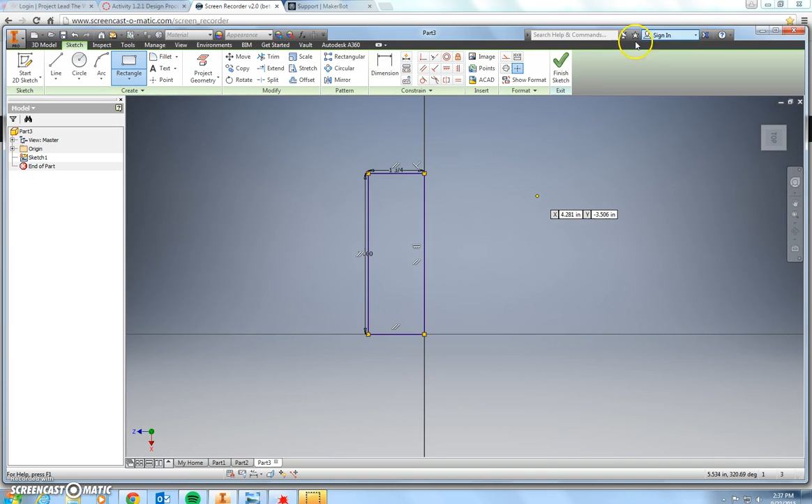I can see that this object is 5 by 1 3/4. You're going to type in 1 space 3/4 for fractions. Type it in just the way it looks. Don't worry about decimal equivalent. The computer will take care of that for you.

Okay, we're going to finish this sketch, and let's make it the entire height it should be, which in this case is 2 3/4. So I say 2 space and then 3/4. Use the keypad on your keyboard to make that.

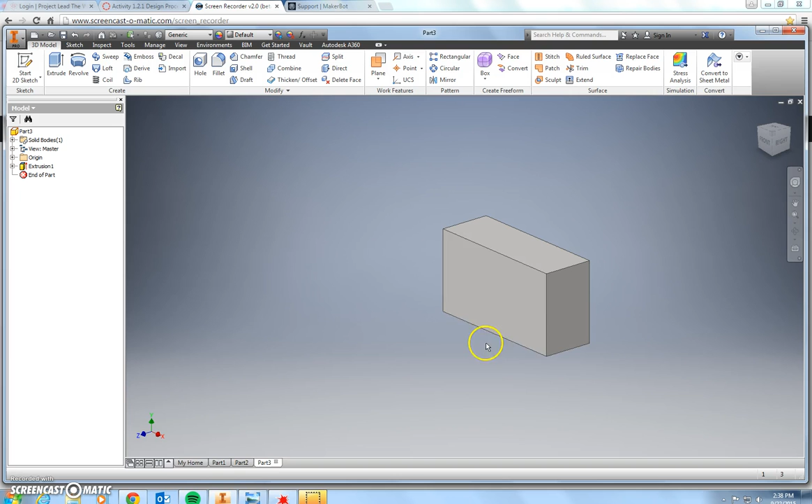Great. Now what I'm going to do is I'm going to draw a shape to cut out, the two shapes. I'm going to draw on the face, and I always like to work from my home view. I'm going to show you a little trick here. I'm going to make a rectangle, and I'm going to just draw it on the line. Now this rectangle is not going to be in the right spot. It will be the right size, and I will move it later.

The size it should be is the dimension in blue should be 1 1/4 by, and this is a hard measurement to read, 9/16. And you can barely see it there. It's hard to read on your drawing.

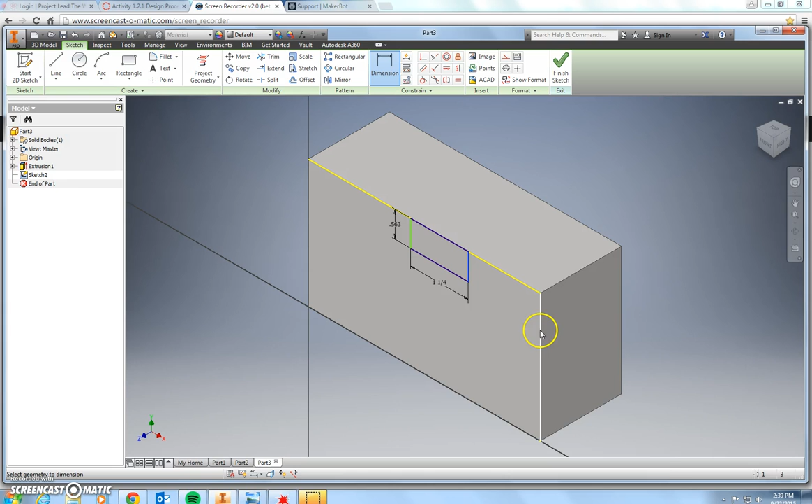Once I have that, I need to move the entire shape from this line to here to push it over to the right location. So I'm going to choose this line and this line after grabbing my dimension tool, and I can move that to its proper location, which is 1 7/8, so 1 space 7/8, and you can see it just moved it on down for me.

Next, I need to draw the shape underneath, which is essentially a square shape with the corners cut off. But I'm going to draw that using my point tool to lay out some dots and then connect the dots. I like that the best. So first let's take a point and drop it on the line. Make sure the line turns black.

I then am going to move that point from here to the edge. We're going to make that 1 1/4. If you look at your drawing, you'll see that that corner is 1 1/4. 1 space 1/4.

Alright. Now what I'm going to do is I'm going to drop another point straight above it. I'm going to highlight that one, come straight above it with my line tool, and make sure I have my dotted line, and just click. It's straight above, but it needs to be a distance above, which is a 1/2 inch. So I'm going to dimension this here to here, and a 1/2 inch is also 0.5. It's an easy one to do. It's the only time I really like to use my tool like that.

Now let's put the other point on the other side. If it doesn't give me a measurement from here to here, I should assume it's the same. So I'm going to drop a point, dimension it to be 1 1/4 from the edge, 1 space 1/4.

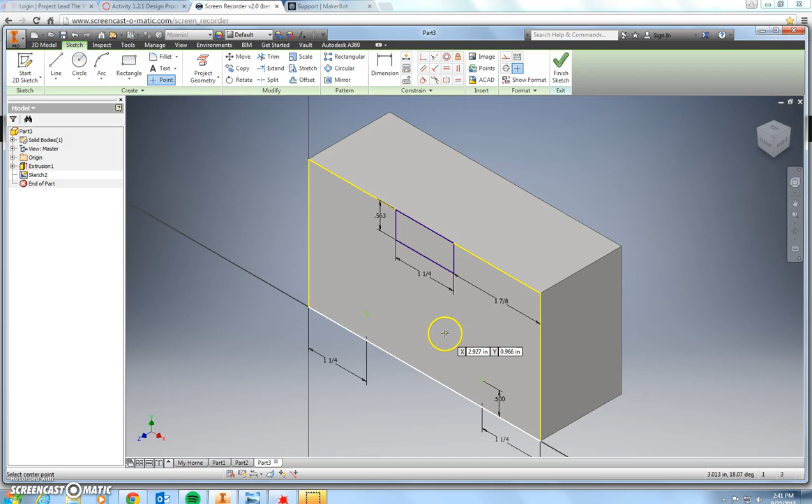Now I want to find 2 more spots to get those in the right area. I want to have a point which is located one about here and one about here. Let's get those laid out. I'll show you how I'm going to do that. First of all, I know that I need to be 1 1/4 inches from the ground up. 1 1/4. That'd be 1 space 1/4.

And let's go ahead and do this one too. 1 space 1/4. Okay, great. The only problem now is they need to be moved around a little bit to get them in the right spot. If I look at my drawing, I can see that this one should live 2 1/2 inches from here to here, okay, which is good.

And this one should be, if you look at this point, it's kind of hard to tell, but it's a 3/4 inch. If I could draw a straight down line, the distance from here to the line going straight is 3/4. So the dimension tool will actually do that for me. Choose dimension, we're going to choose this one and this one. And if you look in between them, you see that 0.75? I actually do want 3/4, and it happens to be that. I just must have got lucky. I'm going to drop that one.

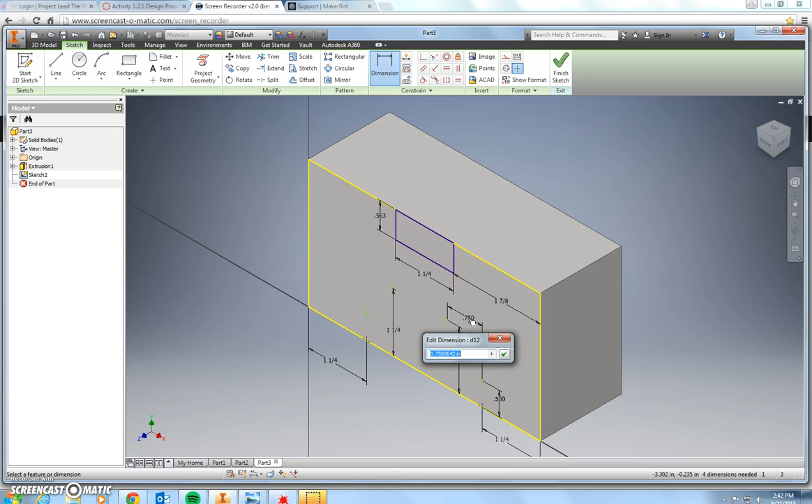Say OK. And we're going to do the same thing for these two. Oh, that didn't quite work the way I wanted. I'm going to back up a step. Do this again. Dimension. Choose this one. Choose that one, and I should get my line. There it is. Sometimes you got to move your mouse around. It's kind of hidden in there. Now that one's not 0.75 yet, so that one does have to be 0.75. It's a 3/4 inch. All right.

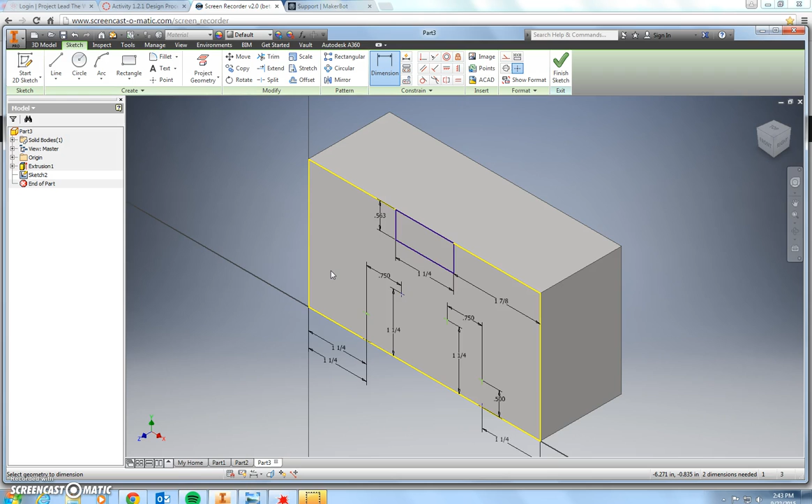Oh, look what happened. It moved this guy over. I didn't want that to move over. Why did it move? It's because I never gave it a dimension. Notice that other ones have dimensions, so this one has to be the same as that one. So let's get that back over there. That should be the same as the number underneath, which is 1 1/4. 1 space 1/4. Now notice it forced it back over. If you don't have a number attached to things, sometimes the whole thing will move because you didn't tell it it couldn't. Numbers will force it to stay put.

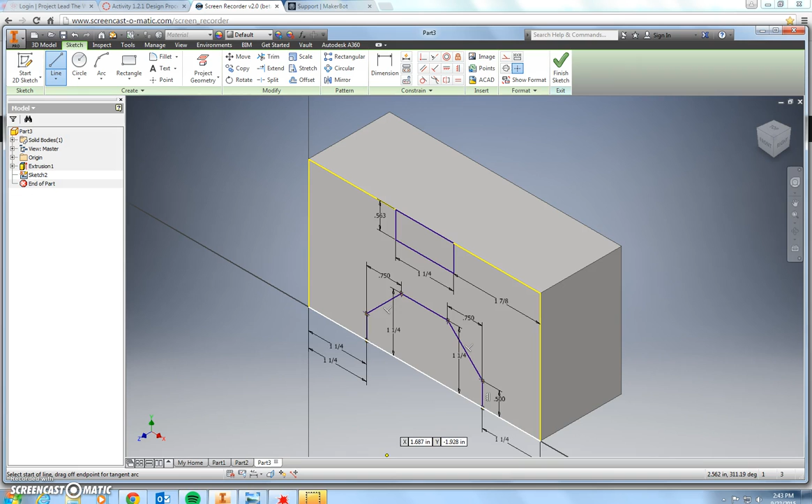Now, after getting all those dots on there, I can just connect the dots. Line tool. Might as well start here. Go to my first one, second one, cross to that one, down, down, and then it's allowing this little bottom line to be part of my shape. Now, I should be able to finish the sketch, and I should be able to push away not this shape or this shape, but the middle.

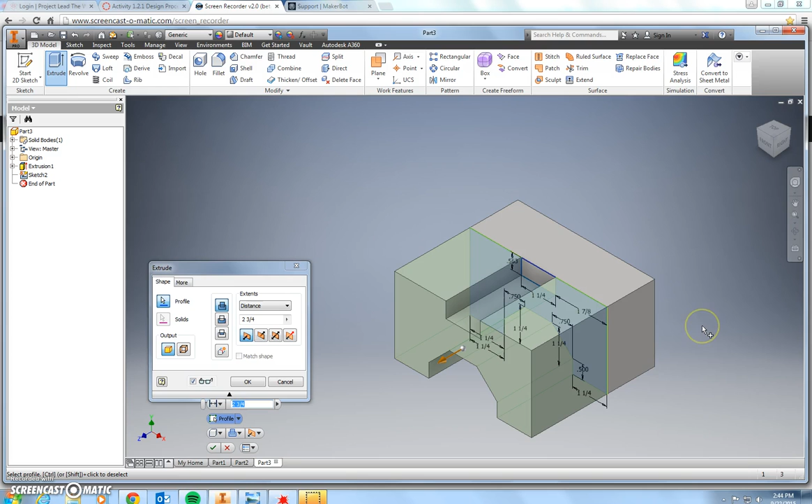Finish sketch, choose extrude. Now, notice that I can either choose this one, or the middle. I want the middle, watch. Click the middle. Now at this point, it's moving it the wrong direction. I want to go in. But I don't want to go all the way. If you look, it's hard to see, but the thickness of the back of the object is a 1/2 inch thick. So under distance, you have the entire distance, which is 2 3/4, which is too much.

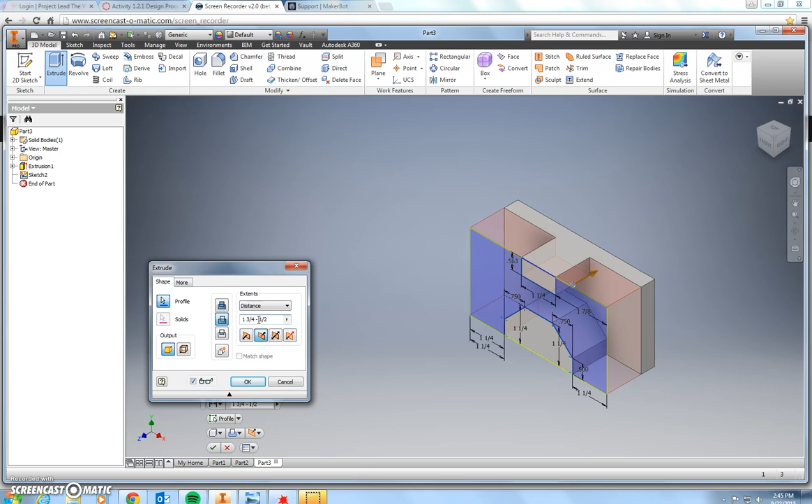So let's put the entire distance in. We won't even do the math. The entire distance I know is 1 space 3/4. Now that's how thick it is. But I want to leave behind a 1/2 inch. So I'm going to put a space, a minus, a space, and I'm going to say 1/2. Now notice what the drawing's doing. It's cutting the entire thing, but it's going to leave a 1/2 inch left, meaning everything but a 1/2 inch. So by typing that minus in, you can actually do that, and it looks good here. So in this case, I kind of did it in reverse. I drew the two shapes to keep, but then removed the middle.

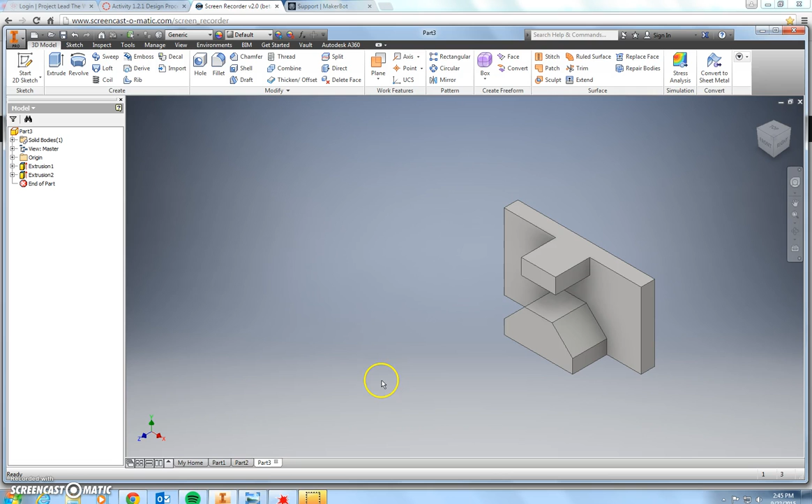Now all I have to do is start cutting my angles and drill my hole. I'm going to start a sketch on this face. Go to your home view. I now will put my reference points. I know I need to go from this corner down to a spot somewhere here. If I look, that spot is 7/8 of an inch from here up. So I'm going to use my point tool, like so, and dimension it to 7/8 up.

Alright. Now, I'm going to use my point tool, and I'm going to go ahead and touch this one. Come all the way across. See, it's still touching. Touch my line at the same time, and now I've dropped another one on the other side at the same point. Let's look at the front to do this.

I'm now going to choose my line tool. I know I want to start in this corner if I can. Let's see, I might have to use my home view for this because it's hard to see that I'm grabbing in there. See that corner? It's a little hard to tell. It thought I was grabbing out here. So grab that, drag it down to here, and it looks like I need to draw a line across here too to make that shape.

And let's just draw the whole outline. And let's do the same thing here. From here to here to here to here. Let's try to... Oh, I goofed up, didn't I? I didn't go back to that. Let me back up. You get to see me make mistakes too.

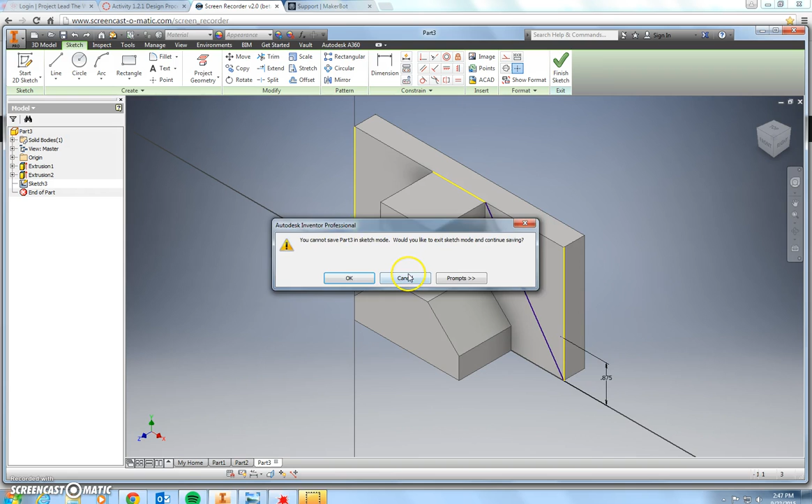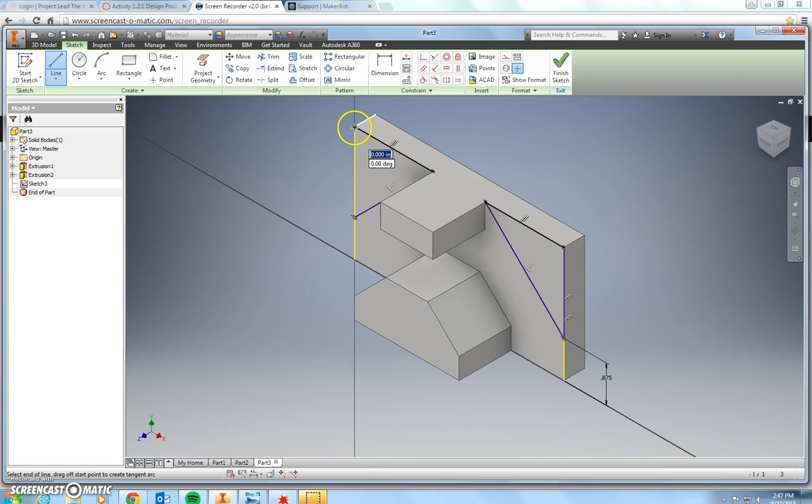Oops. So what I want to do is back up to that step, and I can choose my line tool now. And I was supposed to go from here to here. Silly me. And I just like to outline everything just in case, even though it may work. Now let's do this one. Good. Finish the sketch.

Choose extrude. Highlight both objects first. And let's go distance all. Notice that is stuck on top of its shortcut, so I'm going to move that. Distance all. Okay, we're almost there. Now we have a hole to drill. If you look at it, it tells you it's a 1/2 inch hole, and it's centered in the object, which it doesn't really tell you, which is sort of confusing, but I know it's 5/8 of an inch up and centered in between 1 1/4.

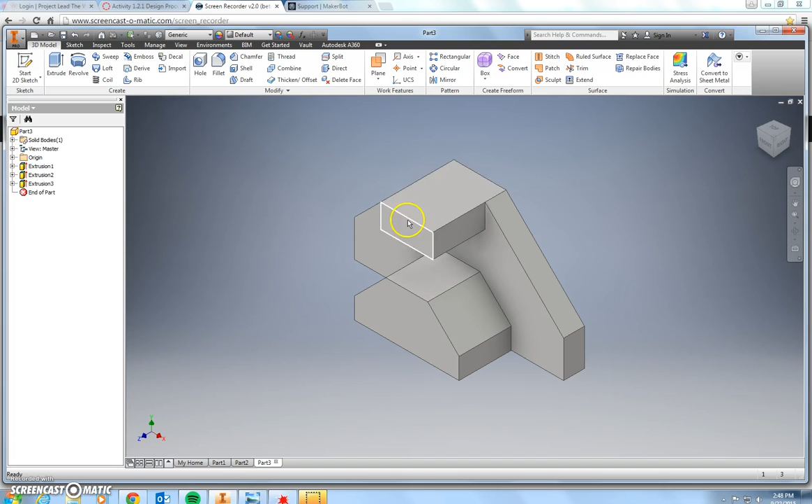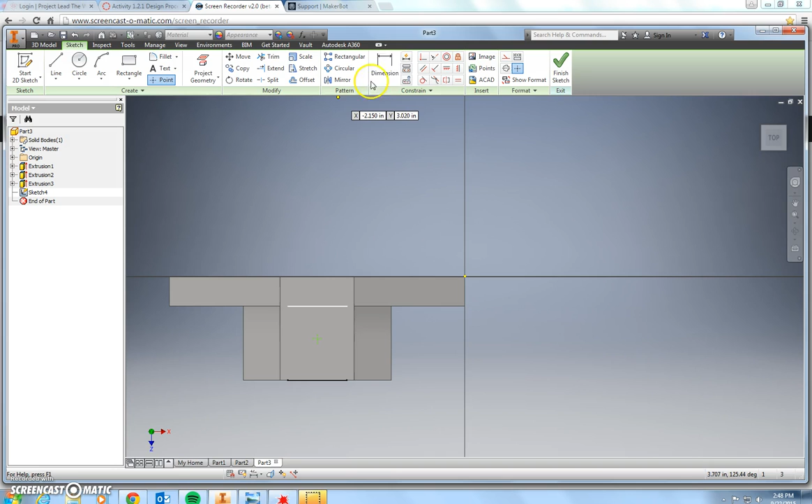Now, if you guys remember, the green dot shows me the middle, so I'll be able to find the center pretty easy. So I'm going to start by creating a sketch on the top. I'm going to use my point tool. I'm going to touch the green dot here and just follow up so I know I'm in the middle, and then just drop it. Then I will use the dimension tool and make sure I set this to be 5/8 of an inch.

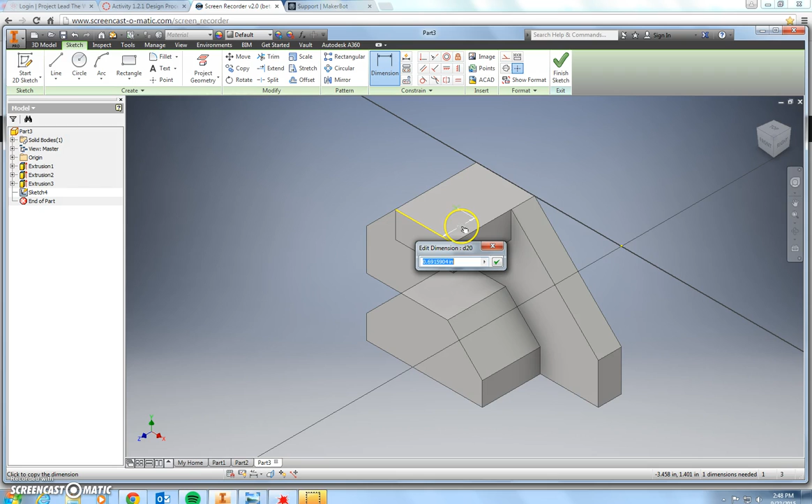Sorry about that. Let's go back to home view. I like to work from my home view. It's so much easier for me to see what I'm clicking on. There we go. And that should be 5/8. If you're not working from your home view, it thinks you could be clicking anything that's even behind an object, so it can be kind of confusing. Now the size of that circle is a simple 1/2 inch. Choose your dot. Type in 0.5 or 1/2 inch if you'd like.

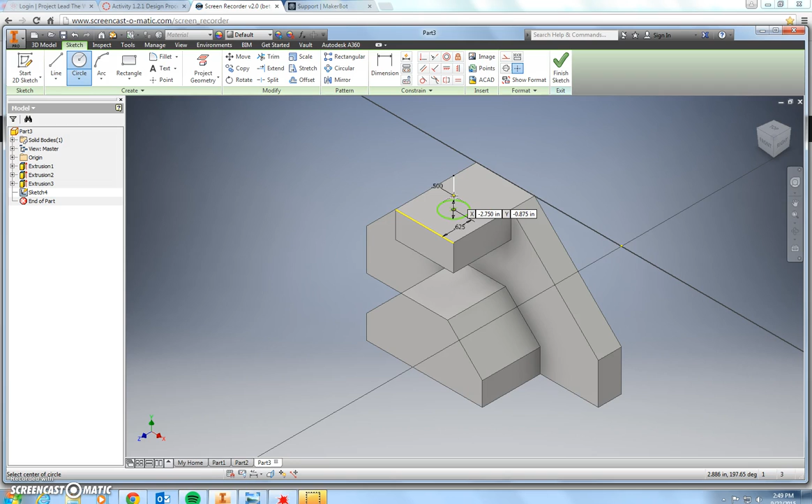And there that is. If you notice, it does not tell you how deep it is. If it doesn't tell you how deep, you should assume it's cutting the entire thing, at least from here to here, not all the way into that. Notice it doesn't cut that deep. So let's say finish sketch.

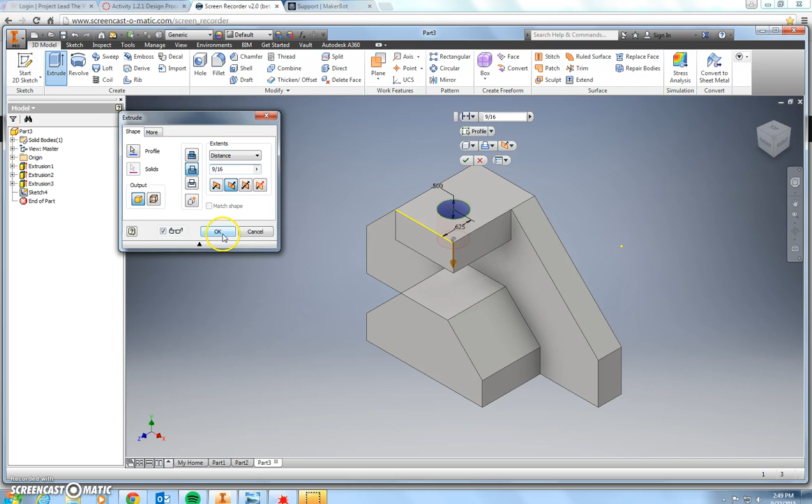Let's say extrude. Now if I click distance all, that's bad. It's cutting into this. Remember, it's only 9/16 thick. So under distance, you're going to change this to 9/16, just to guarantee we cut through that thing. And then click OK. We didn't cut all the way, but we cut through like that. So that is the finished figure 750 jig block.